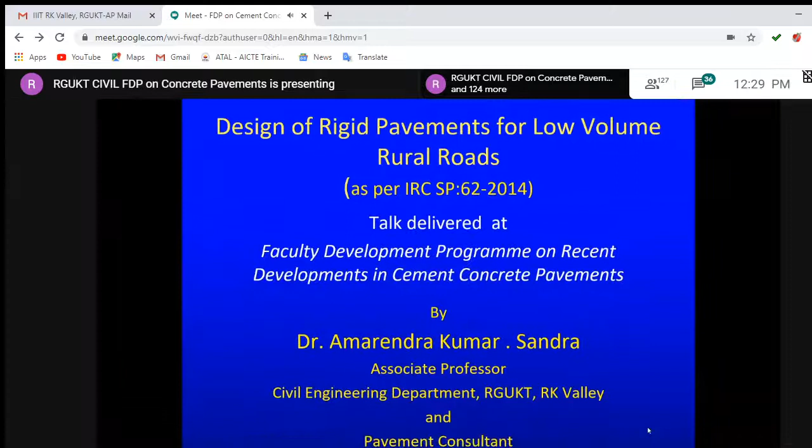In yesterday's presentation, Dr. Dharmveer from IIT Mumbai mainly concentrated on dowel bars, placement of dowel bars, and the problems that generally occur if you misplace them. Then Mr. Suresh discussed how they calculate stresses in concrete pavements using finite element methods, finite element analysis. Then Mr. Santosh mainly concentrated on high performance concrete.

In the morning session, again a wonderful session I can say, Dr. Ramchandra discussed white topping. White topping is becoming very, very popular in many urban areas. Dr. Ramchandra first mentioned that on road number 10, Banjara Hills, they have done this white topping pavement.

For that white topping pavement, at that time I was in GMR Infrastructure, and myself along with a professor from Jain College Hyderabad, we designed it. When we designed it, initially we just checked the existing pavement composition. We were surprised to notice that the thickness of the existing bituminous layer was approximately 1.2 meters. Imagine, just the bituminous layer thickness alone, not even counting the granular layers and subgrade—leave those aside—only the thickness of the bituminous layer itself was 1.2 meters.

What is happening is, every time the road fails especially in urban areas, people simply put one layer overlay on the existing pavement, so the thickness keeps increasing cumulatively. In many urban areas, the thickness of the bituminous layer becomes more than 0.5 meters, which is very common, and sometimes even 1 meter, with a new layer put every 6 months. In those cases, definitely I can say white topping is the solution.

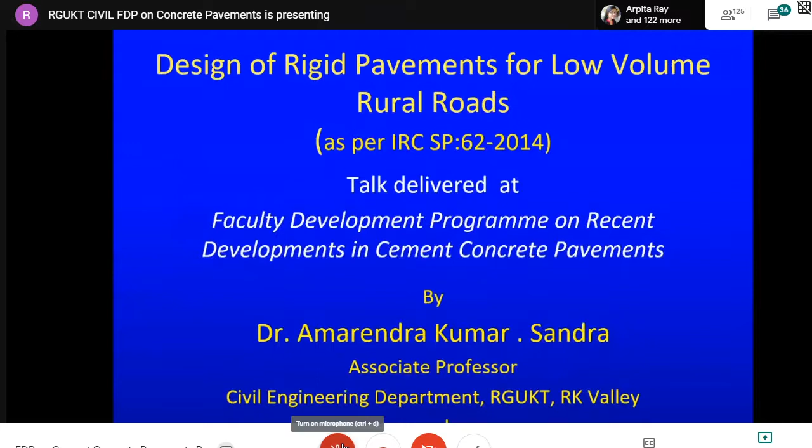Let me start my presentation. We all know that NRRDA, the National Rural Road Development Agency under the Ministry of Rural Development, Government of India, took the initiative to connect villages with all-weather roads. You all know what all-weather roads means: providing a blacktop surface or concrete surface on the granular road so it can sustain all weathers without any problem. We generally call these all-weather roads.

In the case of rural roads, the traffic volume is generally low, consisting of agriculture tractors, LCVs (light commercial vehicles), buses, motorcycles, and two-wheelers. So granular layers with a thin bituminous layer is the most common option. Most of the rural roads—I think most of you are from rural areas.

Under this PMGSY program, at the start of any rural road, you will find a board showing the pavement composition. In that composition, most rural roads have a granular sub-base layer and a granular base layer. Over the granular base layer, we generally call it WMM.

I request participants to be careful with the terminology for the various pavement layers. Subgrade is the base. The next layer on the subgrade is the granular sub-base layer, then the granular base layer. People generally call this a WMM layer or WBM layer, and in practice both terms are used.

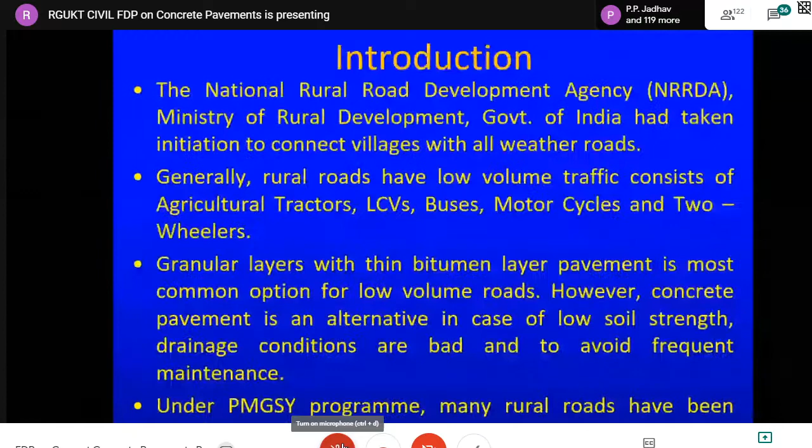Let us see the scope of the IRC guidelines - IRC SP 62 guidelines. First, IRC 58 guidelines deal with concrete pavement for major roads carrying average daily traffic exceeding 450 commercial vehicles per day, CVPD. Commercial vehicles means those whose gross weight is more than 3 tons. So for such cases, you can directly use IRC 58 guidelines.

You may ask me a question here - sir, can we use IRC 58 guidelines for rural roads also? Yes. If the commercial vehicles exceed 450, you have to use IRC 58 guidelines.

I have noticed, even in my area, that when two parallel highways exist - say a national highway and a state highway - connected by rural roads, people prefer these rural roads to save distance. In some cases, even heavy commercial vehicles prefer to travel on rural roads due to distance considerations.

So in those cases we have to be very careful while conducting traffic studies. We have to estimate the total number of commercial vehicles expected on a particular road. If the number of commercial vehicles is more than 450, you have to use IRC 58 guidelines; otherwise, go for the IRC SP 62 guidelines.

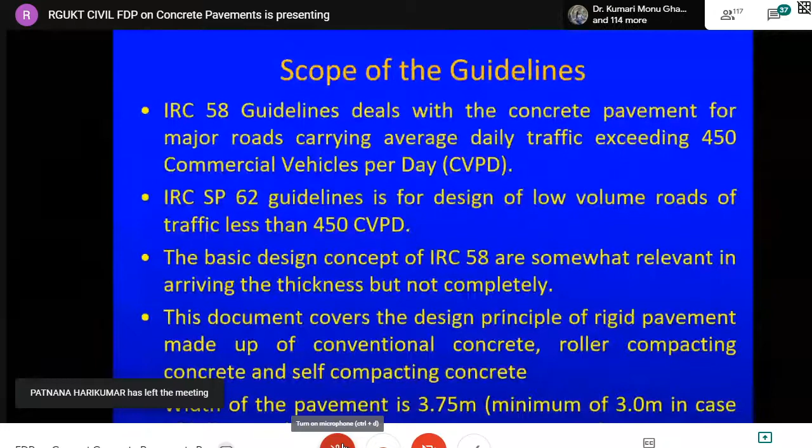So accordingly, we have to see this and select the transverse joint spacing, right?

Next, coming to the IRC SP 62 guidelines, what are the various factors that govern the pavement design? Traffic is one of the very important factors everywhere. Traffic, tire pressure, and design period.

Let us see traffic here. In case of rural roads, we have already discussed low volume. Generally you don't find heavy commercial vehicles, but occasionally one or two may pass; most of the cases you find light commercial vehicles. That's why heavy vehicles are not expected on rural roads.

The maximum legal load limit of single axle with dual wheel is 100 kilonewtons. I'm using the word legal load limit. There are two loads we generally consider: one is the standard axle load, the other is the legal axle load.

Standard axle load we take in case of flexible pavement design is 80 kilonewtons, and the legal axle, the maximum load allowed, is 100 kilonewtons. So the recommended design load on dual wheel is 50 kilonewtons with a spacing of 310 mm center to center. We consider the standard axle load of 80 kilonewtons and here the legal axle load of 100 kilonewtons, taking an axle with dual wheels on either side.

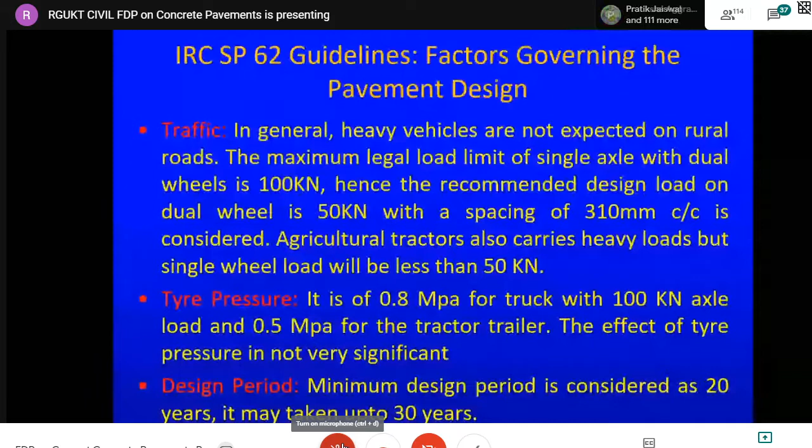Now, here is the design traffic for thickness evaluation. I request everyone kindly concentrate on this slide, it's very important. This slide governs the rest of the design aspect.

Let us see that for traffic less than 50 CVPD, commercial vehicles per day, only wheel load stresses need to be considered for the design. Only wheel load stress, no temperature stress is to be considered for the design.

Why? Imagine in 24 hours in a day, only 50 vehicles are expected to pass on a road. 50 vehicles means you don't know when it may go. Approximately, let us say 3 vehicles per hour in daytime and maybe 1 vehicle per hour at night time, so the total put together is 50 vehicles.

So when Professor Reddy explained about temperature stresses, he said in the daytime when the temperature differential occurs. Temperature stress means the differential of temperature, that is, what is the temperature on the top fiber and what is the temperature on the bottom fiber. If the difference of these temperatures is more, then only temperature stresses are possible.

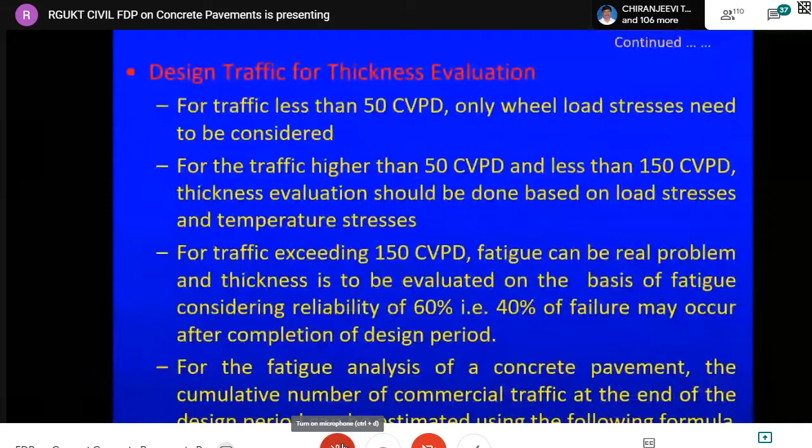So most rural roads fall in case 1 or case 2. That's what we need to find - the total number of vehicles.

This is the formula, as you have seen even in case of bituminous roads, and this is the formula generally used to find the total traffic, the total number of commercial vehicles at the end of the design period, where A is the initial traffic and R is the growth rate. N is the design period, and generally we consider N as 20 years.

Please see the last statement here. For cumulative fatigue analysis, only 10% of the value obtained from the above equation is considered. I hope most of you have studied IRC 58 guidelines, where we consider 25% of the total number of commercial vehicles for design. Why 25%, why 10%? Because we expect that approximately 25% of vehicles pass along the edge of the pavement.

Nobody would like to travel along the edge of the pavement, right? They give some space while traveling. In rural roads, nobody likes to travel on the edge; generally they go in the middle of the pavement. If the width of the vehicle is approximately 2.5 meters and the pavement width is 3.75 meters, we have a sufficient gap of 0.5 meters on either side. That's why only 10% of the total number of vehicles need to be considered for pavement design. Please remember this point.

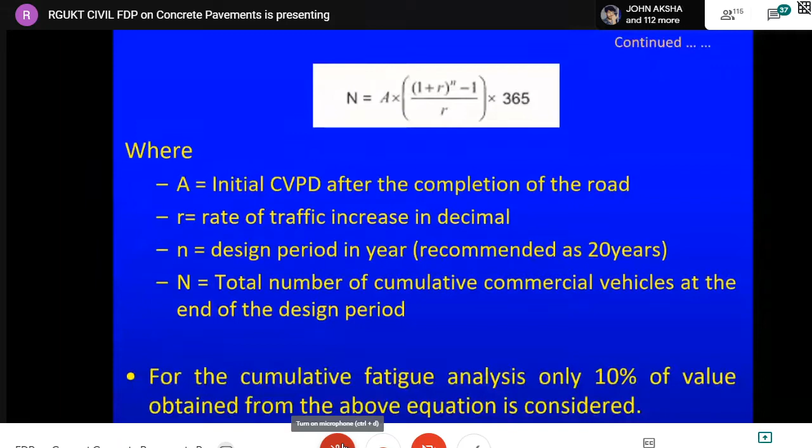Next, how do we find this? In rigid pavement design, unlike flexible pavement design where strength of subgrade is expressed in terms of CBR value, for rigid pavement design the strength of the soil is expressed in terms of K, the modulus of subgrade reaction. The standard method to find the modulus of subgrade reaction is the plate load test.

The plate used for finding the modulus of subgrade reaction always matters. Generally we use a 750 mm diameter plate. But a 750 mm diameter plate means you have to put more load to achieve a standard deflection. To avoid that, you can go for a smaller plate, even 300 mm diameter. If you use the 300 mm diameter plate, we have a relation to convert and find the equivalent modulus of subgrade reaction for the 750 mm diameter plate.

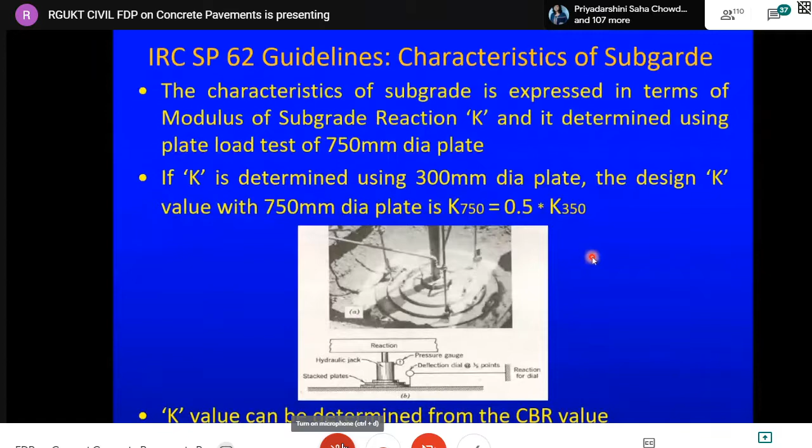Now I want to stress more on the characteristics of subbases. In rural road concrete pavement design, a good quality compacted granular or cement treated layer provided below the concrete slab is termed as subbase. But as per IRC 58 guidelines, if you look at the cross section of the pavement, on the subgrade we have a GSB layer, that is the granular subbase layer. On top of the granular subbase layer, we again have a layer also called subbase, but this one is treated either with bitumen or cement.

Generally the terminology we use for this treated layer is DLC, dry lean concrete layer. On the dry lean concrete, we place the PQC, with a polythene sheet in between, as you all know. However, in rural road concrete pavement, you can directly provide a compacted granular and cement treated layer below, over which you place the PQC.

Here you can see the advantages of providing this subbase layer, which we all already know, so I won't go into that. So we have here different types of subbases, right?

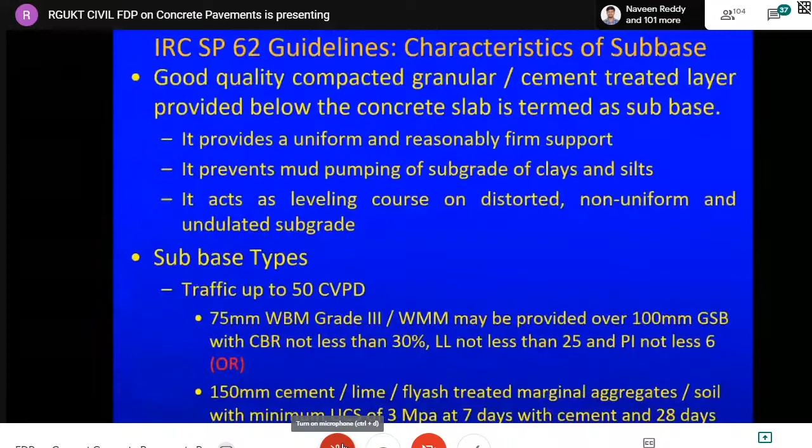Since you are providing strong base layers here, you can see that 150 mm cement or lime fly ash treated marginal aggregate soil, or soil with minimum UCS value of 3 MPa, can be provided as the base layer - I should say the sub base layer - in case of concrete pavements in rural areas.

For traffic from 50 to 150 CVPD, you have to go for 75 mm WMM grade 3, or WBM may be provided, or 100 mm GSB - same composition as discussed previously - and 100 mm thick cementitious granular layer with minimum UCS (unconfined compressive strength) of 3 MPa at 7 days with cement, or 28 days with the same UCS. This is because other cementitious materials like lime and fly ash take a little more time to gain strength.

Next, the last case is traffic from 150 to 450 CVPD. Again the base layer composition is 150 mm here - whereas in the earlier two cases it was 75 mm. Here 150 mm WMM or WBM may be provided over 100 mm GSB. So everywhere the GSB thickness is 100 mm. Depending on the traffic, the thickness of the base layer changes. That's what we have to provide, and over which we can go for a concrete pavement layer, right?

Now I wanted to discuss something, because when I discuss with industrial persons and even academicians, they say construction of these cement treated layers is very, very difficult, and that we don't have proper equipment. This misconception is there, so I just wanted to show you.

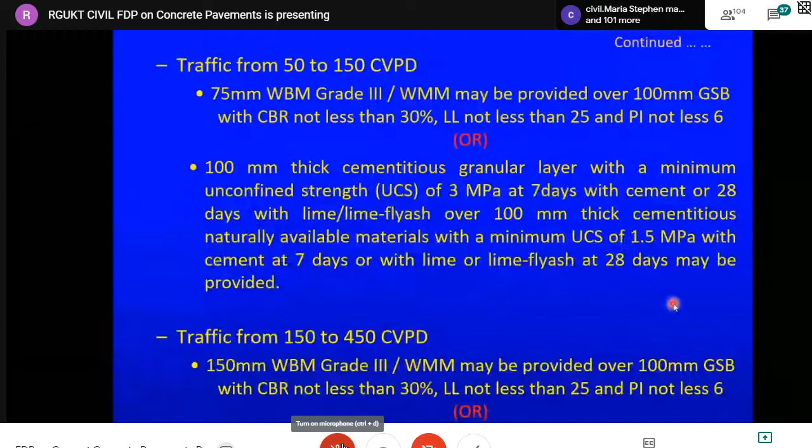A 100 mm thick cementitious granular layer requires a minimum UCS of 3 MPa at 7 days with cement, or 28 days with lime, over a 100 mm thick cementitious naturally available material layer with minimum UCS of 1.5 MPa. Naturally available material means you can use the soil itself. If some gravel is present in the soil, that is very good, and you can add cement to achieve the minimum UCS value of 1.5.

So we have taken a soil. Actually, this road we have constructed, a service road in the Hospet to Hungund project in Karnataka, using the stabilizer. There we have constructed small stretches, building a rigid pavement as well as a bituminous pavement.

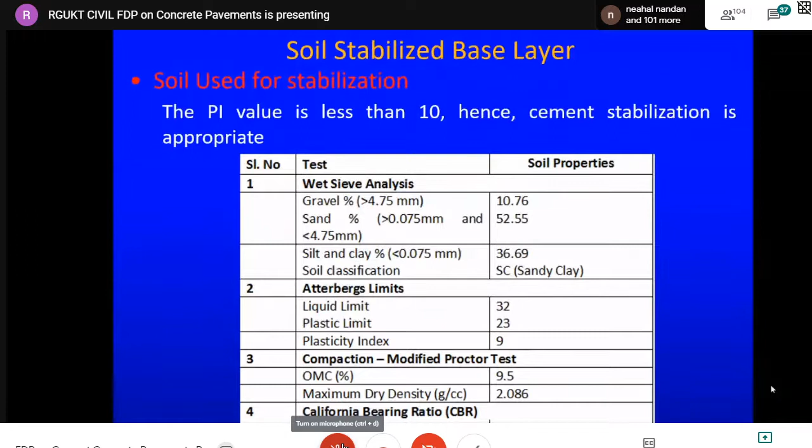Now this is the properties of the soils, and you can see the laboratory tests on stabilized soils. When you add the material, for the soil alone combination, these are the OMC and MDD we got, and the UCS value we observed was 0.4.

Then soil plus 2% cement: with 2% of cement, we got a UCS value of 1.64. In the previous slide, we saw that the minimum UCS value should be 1.5. At 1.5 on the stabilized soil, we can go for the cement-treated granular layer, which is one of the options given in IRC SP 62.

So in this case, even with just 2% cement, we got 1.64 as the UCS value, the unconfined compression strength value. So I can straight away say that with 2% cement, we can directly use it for construction of the stabilized layer.

Another very important test we need to conduct in case of the stabilized layer is the wet and dry test, to check loss in the wet and dry test. What is meant by wet and dry test? I'll show you in the next slide.

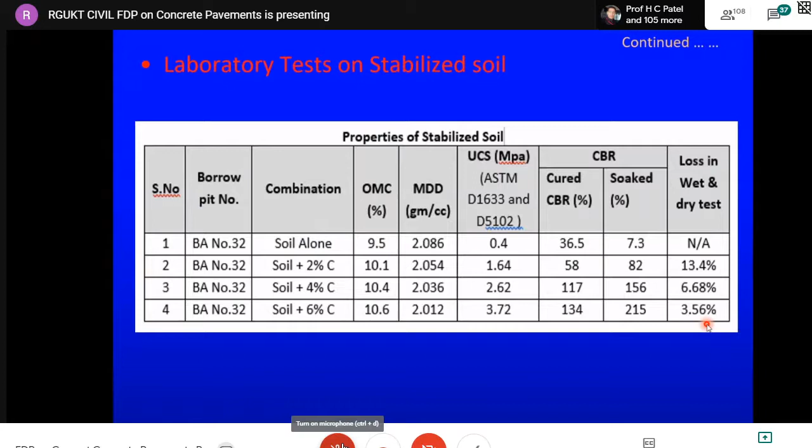Adding more cement is again dangerous. There will be some cracks on the surface, and it will be very difficult to deal with those cracks, because those cracks will penetrate into the upper layers, and finally it will be difficult. So what we have to ensure is that we add less cement and get sufficient strength, and finally that will work wonderfully.

Now I'll quickly go through that. See, a lot of work was done on stabilization in the 1980s also in India. A lot of work has been carried out.

But now people have applied less with respect to stabilization. Why? Because of whether we can get a uniform mix or not. If the mix is not uniform, what are the problems we face in later stages? Because of that, people are really afraid of going for stabilization now.

But in some of the projects recently where I was involved, I have straight away suggested to go for stabilization where the soils are very weak. Suppose in case the subgrade soils are weak, generally we have two options: either we replace the subgrade with some other soils, or we go for stabilization.

I have suggested stabilization because very good equipment is available even in India, like Wirtgen. They have very good equipment, so that all the stabilization can be done at a time. It will plow the soil, mix the stabilizer, add the water, and finally mix the stabilizer, soil and water, and compact it. Everything can be done at one go.

That's why we have two types of stabilization practices. One is mix-in-place stabilization, the other is plant stabilization. You can go for mix-in-place stabilization in case of rural highways. No problem, you can get uniformity. I can assure you that 85% uniformity you can definitely get even in mix-in-place stabilization.

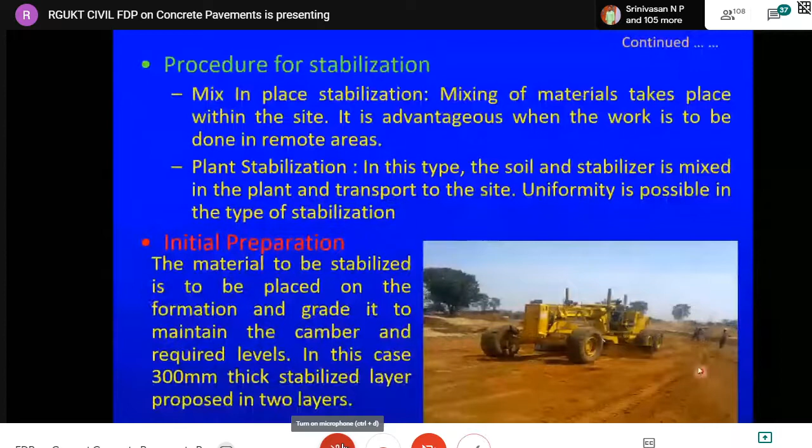So here you can see that we have just placed the soil, then you go for making the grids on the soil, right? These are all done with our guidance only. The site people have executed the stabilization work.

So generally for these grids, we have to see that if using 2% cement, what quantity of cement is required for stabilizing this much thickness of layer. Accordingly you have to make the grid. Generally we know a cement bag contains 50 kg. For 50 kg of cement, what total quantity can it stabilize? According to the percentage, that needs to be calculated initially.

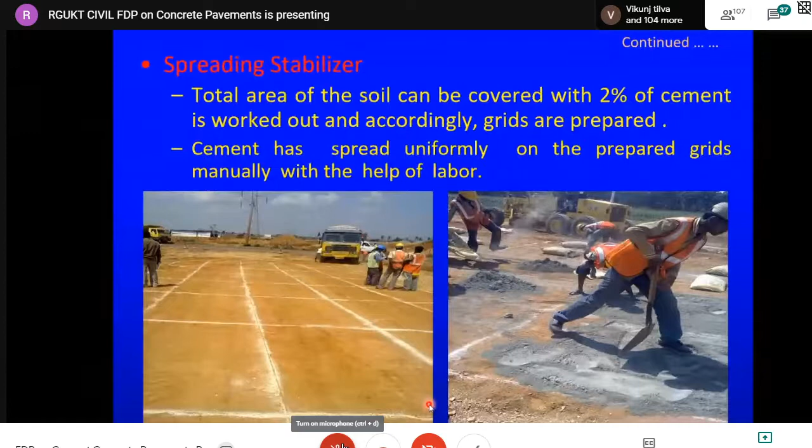Accordingly, you make the grids, then place the cement bags and spread the cement. Then you use agriculture equipment which is available everywhere to mix it if required. Go for 2-3 trials so it will be completely mixed. Then after mixing, go for grading. Grading is also very important.

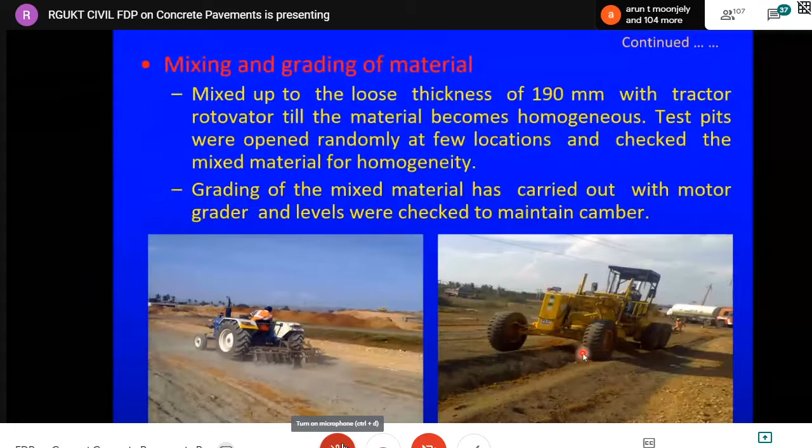You have to do the grading to have the camber. These are some of the equipments available, or maybe suggested by the IRC guidelines. So use different types of equipment. You can use this one, or as I suggested, so you have very good, uniform mix. You can go for the Wirtgen stabilizer equipment that's available. You can even Google it and get a lot of information.

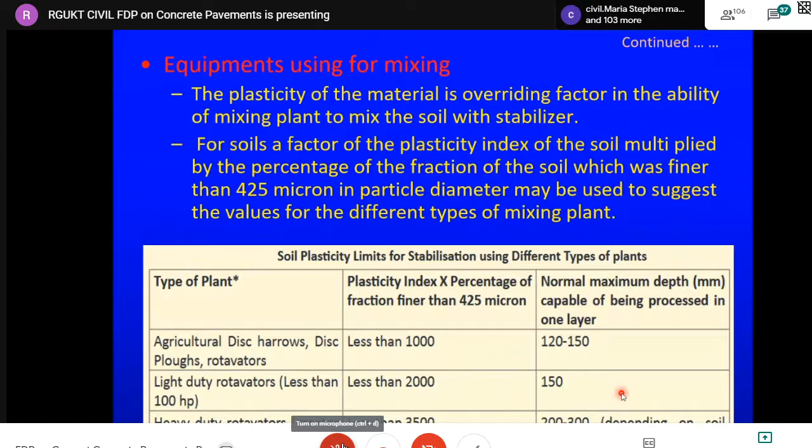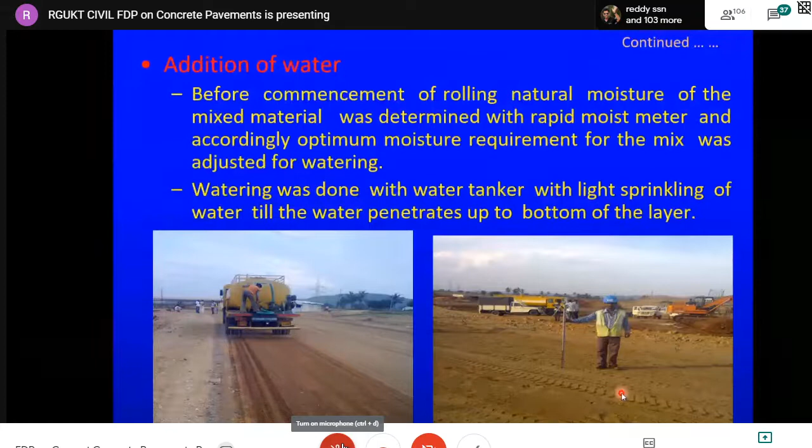After mixing the soil with the stabilizer, the very important thing we have to do is the watering. We have to find out what is the total quantity of water required. A very important aspect you have to remember in case of stabilization is the moisture. Moisture should not be more than the optimum, should not be less than the optimum. Of course, little variation is fine, but we have to add the moisture carefully. Then after adding the moisture, once again you have to mix using the agriculture equipment, so that you get uniformity.

I request you, wherever there is a possibility, go for the stabilization, because the IRC guidelines, IRC SP 62 guidelines, have mentioned to go for stabilization in case of rural roads. It's better to go for the stabilization.

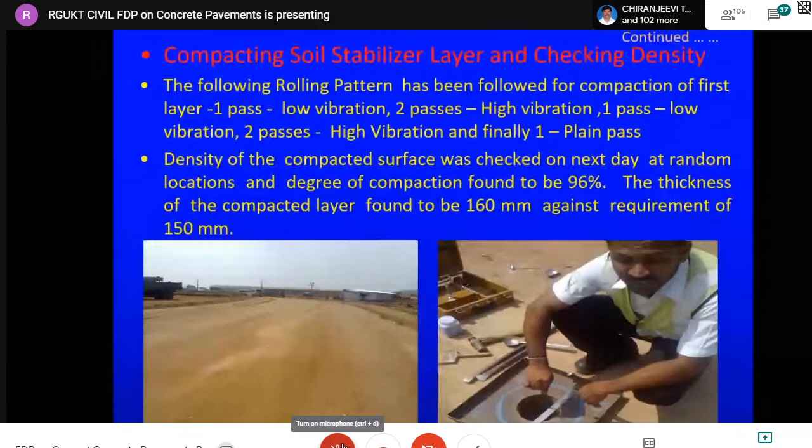So this is the one, right? You can easily get this. So this layer can be used as a subbase in case of rural road concrete pavements, right?

Next, previously we were discussing about the K value, then I discussed about the subbase, all those things. After construction of the subbase, the one important aspect we have to see is what is the K value that we need to take for the design, right? In case of IRC 58 also, we take the design K value on the DLC layer, or I can say the subbase layer. Similarly, here also we have to take the design K value.

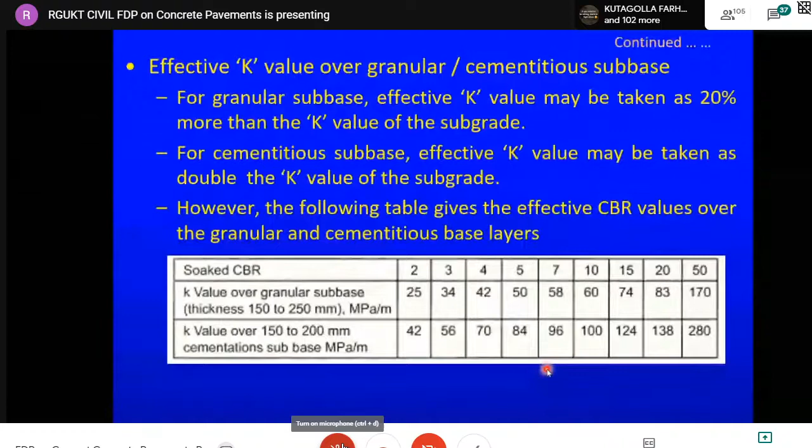Now, properties of the concrete. Here, only one thing I wanted to discuss, because over the last 2-3 days you have heard a number of times about the properties of concrete and what grade of concrete to be used. Please remember, in case of rural roads, we have to use the minimum grade of concrete which is M30. In case of highways, national highways and state highways, it's M40, but for rural roads the minimum grade of concrete is M30.

That we have to ensure. Then, of course, the flexural strength should not be less than 3.8 MPa in case of 3-point bending, that is 3-point loading. Suppose in case of national highways and similar, it's 4.5. Generally here it is 3.8 MPa.

And the modulus of elasticity, we have a relationship between modulus of elasticity and characteristic compressive strength of concrete, that is 5000 root FCK. If you put even 30 MPa as FCK, you will get a little less than this. But the guidelines mention that concrete gains strength over a period of time. So safely you can take 30,000 MPa as modulus of elasticity, and 0.15 as the Poisson's ratio for the analysis.

And you can see here the fatigue behavior of concrete. Generally, for national highways, as per IRC 58, 90% is the reliability. The important aspect I want to tell you is what is meant by reliability. 90% reliability means at the end of the design period, there is a chance that 10% of the pavement may fail. But for rural roads, the guidelines mention that 60% reliability can be taken, meaning there is a chance that after 20 years, there is a 40% chance the pavement may fail. That's what we have to take.

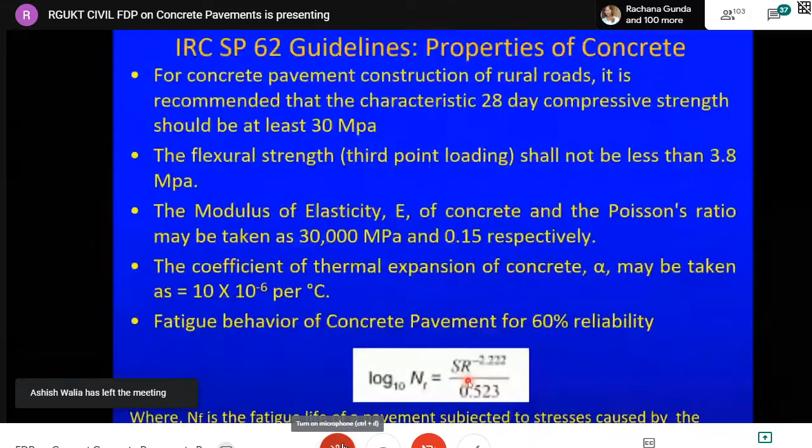Then this is the formula given to find out the total number of repetitions. Here SR is the stress ratio. The stress ratio is the ratio of the stress due to loads to the flexural strength of the concrete.

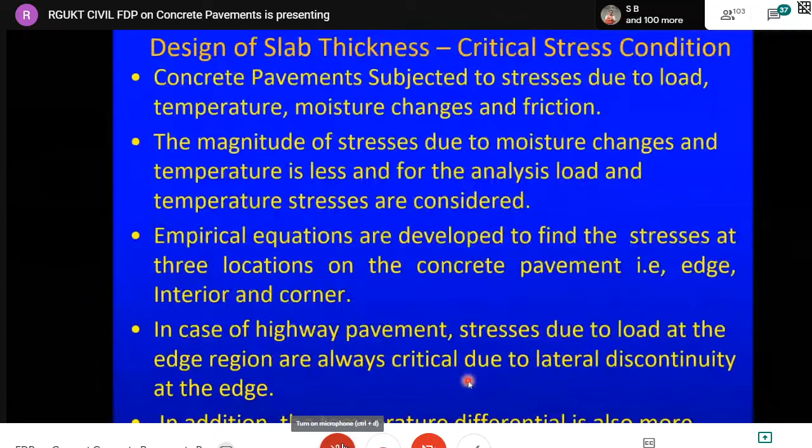Let us quickly see how to design the slab thickness here. As I told you, when the number of commercial vehicles is less than 50, we only go for load stress analysis. If it is more than 50 and less than 150, we consider load and temperature stress, and if more than 150, we have to go for fatigue analysis also. Only edge stresses need to be considered here.

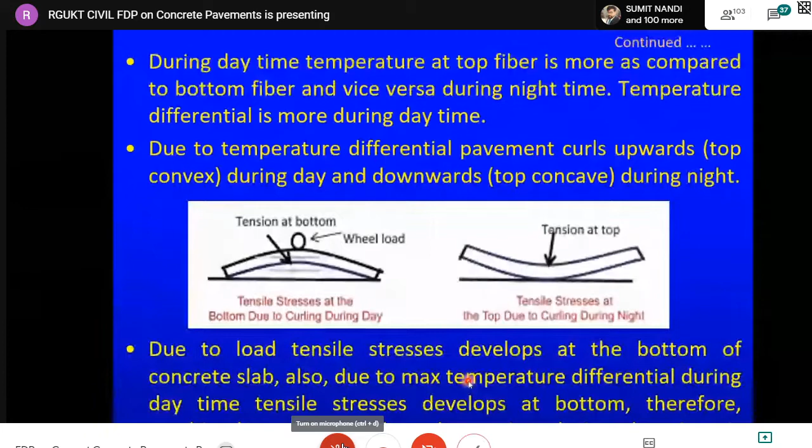There are other concepts which I'll skip here since the resource persons over the last 2 days have already explained how bending takes place during daytime and nighttime. Similarly here also, the bending will be the same.

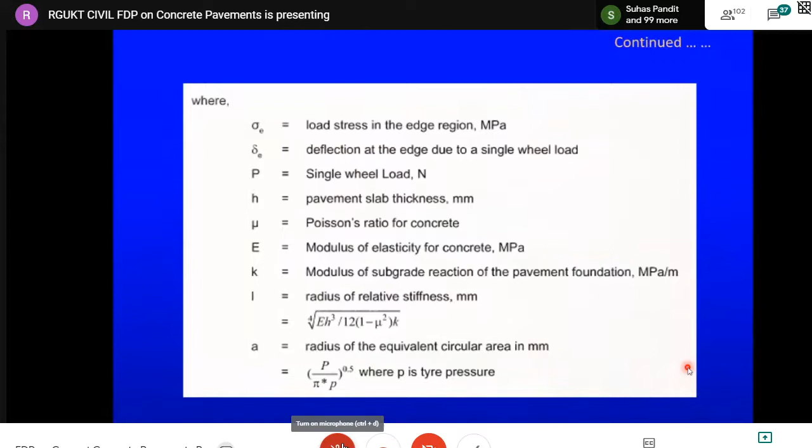We have the Westergaard equation to find out the stress at the edge region. This is the equation that we have to use. One very important aspect we have to note here: in the Westergaard equation given here, P is a point load.

Another important thing to remember is that this Westergaard equation is suitable only for single wheel load. You cannot use the Westergaard equation to find out the stresses in the case of dual wheel load. Suppose here we have two wheels, dual wheel loads, so for dual wheel loads we cannot use this Westergaard equation.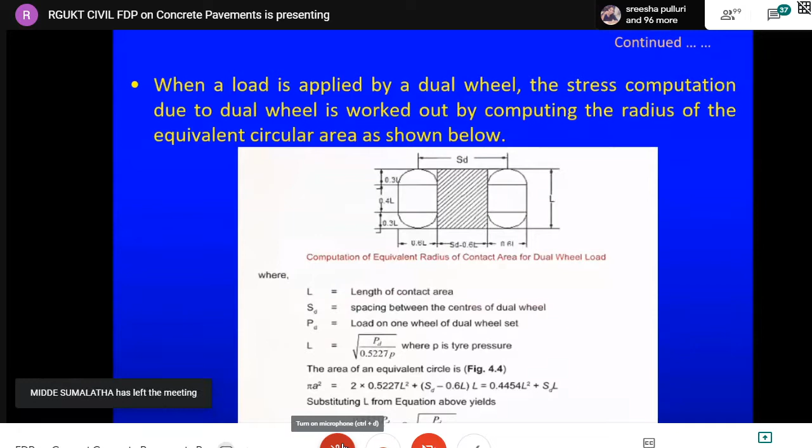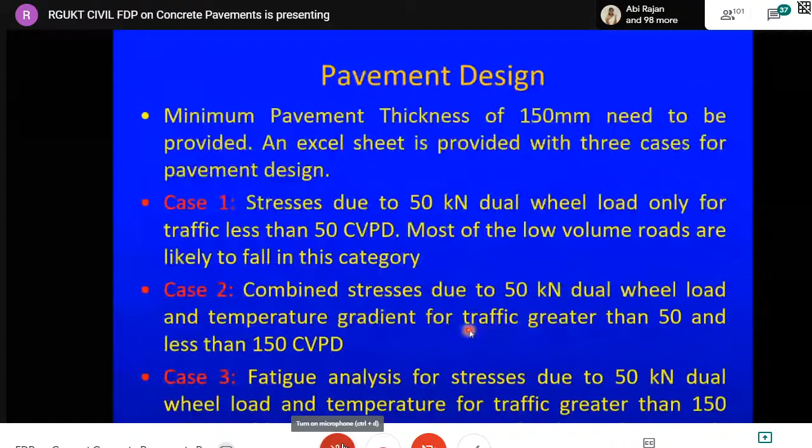So this radius we have to use in this equation to find out the stress at the edge region. Coming to the pavement design aspect, in case one, only the stress due to load we have to take. In case two, stress due to load and temperature that we have to take. And case three, we have to take the fatigue analysis.

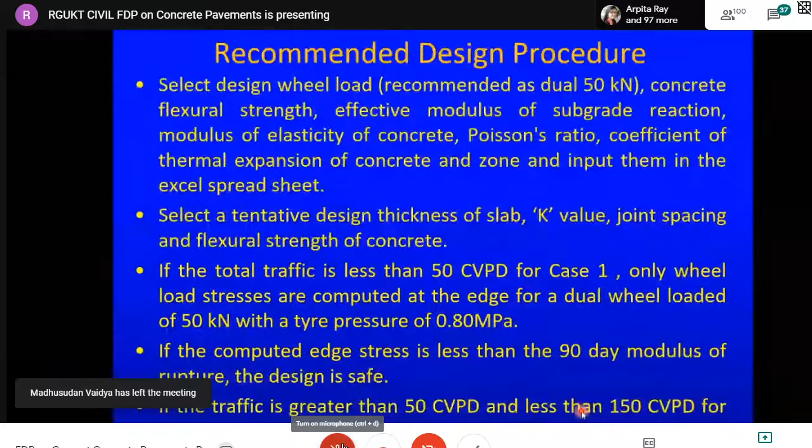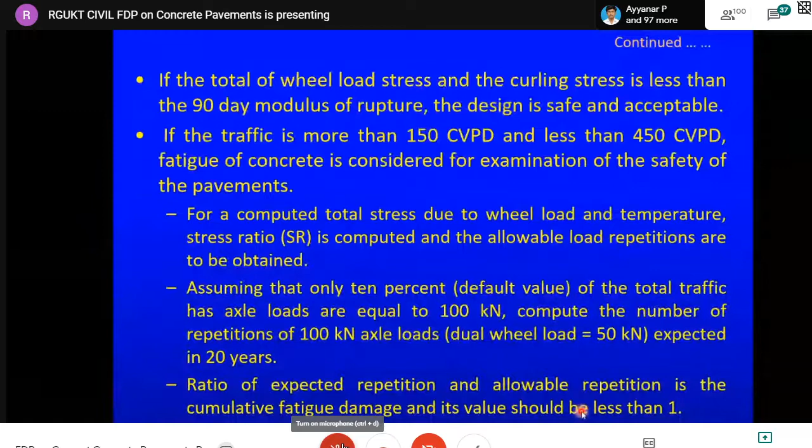So the recommended design procedure is whatever I have discussed, that is there in this case. We have to take the wheel loads, and wheel load and temperature, in which case. So here we have IRC SP 62. They have provided an Excel sheet, so using that Excel sheet, easily we can able to design the pavements. Let me just take that Excel sheet also here.

Excuse me sir, Chetan, sir actually your screen is not visible sir. Yeah okay, I'll just increase it. Now is it okay Chetu? No sir, no sir, sir you have to present the screen sir. Yeah it's been, yeah okay okay. Now Chaitanya? Chaitanya? Yes sir, it is visible. It is coming, yes sir.

You can see here the enter the data, case 1, case 2, case 3, depends on the traffic, total number of the commercial vehicles per day. So accordingly, we have to enter this one, whether it falls in case 1, case 2 or case 3. Once you enter this one, we need to enter only 2-3 parameters, like modulus of elasticity and all, it will take automatically. And modulus of subgrade reaction, if it is changed, definitely it will change depending upon the CBR of the subgrade and what type of layer you are providing on that, so that you have to enter.

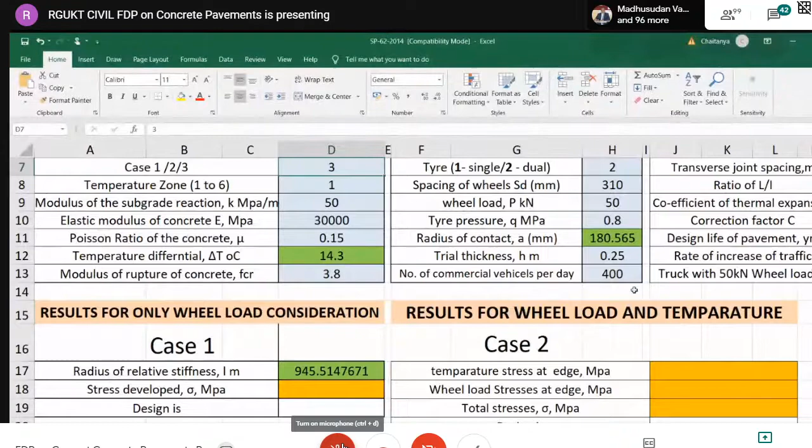Temperature differential we have to enter, it depends upon the temperature differential also. Of course in this case in the Excel sheet it's not necessary to enter because automatically it will calculate from the trial thickness that you are given. The very important thing you have to enter is the trial thickness actually. If you can enter this trial thickness, now you can see here the number of commercial vehicles is 400, so it falls under case 3. Then if you enter the trial thickness, automatically what will happen?

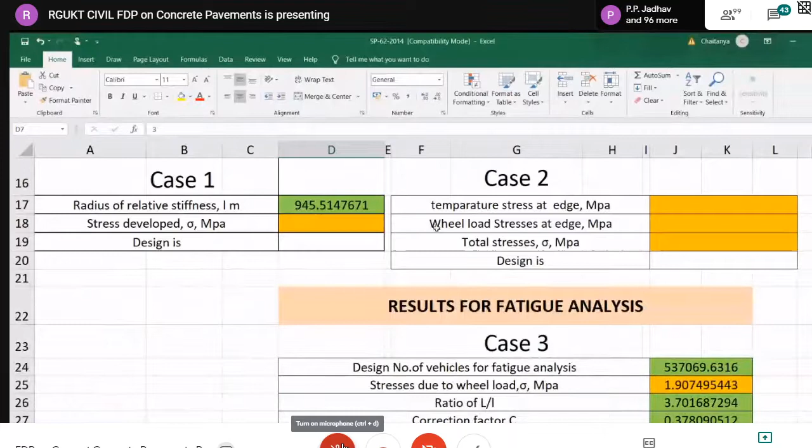So here we have the screens for case 1 and case 2, these will directly become inactive, and directly you will find the case 3 sheet here. In this case, total number of vehicles for fatigue analysis, like from the 400 that you are giving, is the total number of commercial vehicles per day expected on a particular road. Based on that, it will automatically calculate the total number of vehicles and the stress due to wheel load. Wheel load, as I explained, 100 kilonewtons is the standard legal load that we take, so 50 kilonewtons will act on the dual wheel. Based on that, whatever the Westergaard formula I provided, using that formula, it will calculate this.

Ratio of L by L, this depends upon the panel size that you are giving. You know that width of the pavement is 3.75. The length will vary, some you can go for 3.75 or 3.5 or 4 meters. As the guidelines mention, you can vary the length of the panel from 2 meters to 4 meters.

So accordingly, you can select the length so that L by L will change. A correction factor, this is the Bradbury coefficient for the calculation of the temperature will change. Based on this, it will finally calculate the temperature, and finally calculate the stress.

The total stress for fatigue is the stress due to temperature and load. So you get the stress ratio, which means stress due to load and temperature divided by flexure strength of the concrete. What flexure strength do you take? As I told you, we have to maintain the minimum flexure strength of 3.8 for M30 grade concrete. From that, you get the stress ratio.

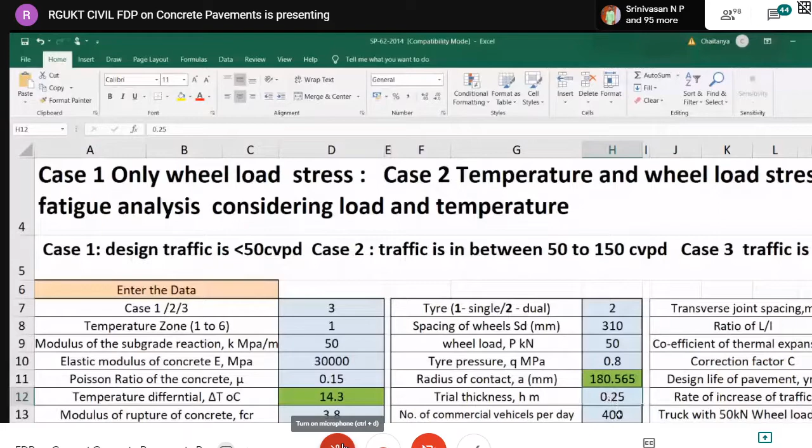So you can even reduce the thickness of the slab. You can try, instead of this thickness, if I put 0.24, let's see now.

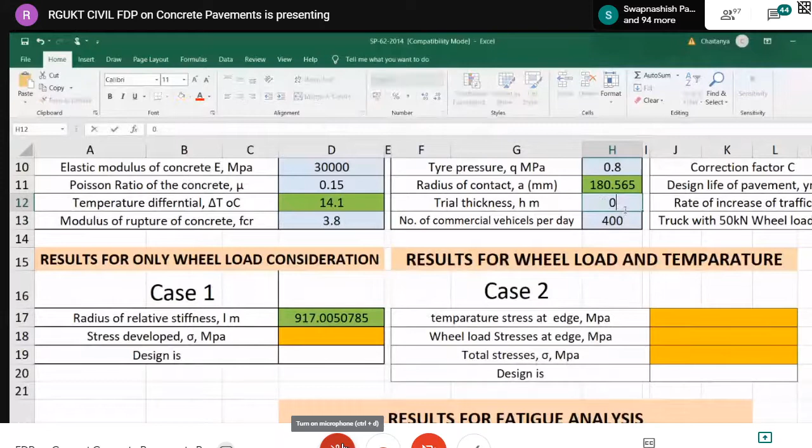The cumulative damage is 0.42 here, and the allowable number of repetitions has significantly reduced. If I put 0.23 instead...

Now it is unsafe, because the allowable number of repetitions here is 1,31,000, and the design number of vehicles that you are getting is 5,37,000.

So you have to play with this, do some trial and error. Finally, you have to find out the economical thickness from this analysis.

Okay, so with this I'll stop here because of lack of time. I could not cover some of the design aspects deeply. I request you kindly go through IRC SP 62, because this is also very much required for the design of low volume roads. Designing low volume roads with IRC 58 will definitely give more pavement thickness, which is not required. You can provide economical thickness using IRC SP 62 guidelines.

If you have any doubt related to design parameters, see the resource persons whom I called in the last 2-3 days, today, and tomorrow afternoon. All the resource persons are very much approachable. If you have any doubt at any time in any area, you can take their mail ID and drop a mail, and they are ready to help you out.